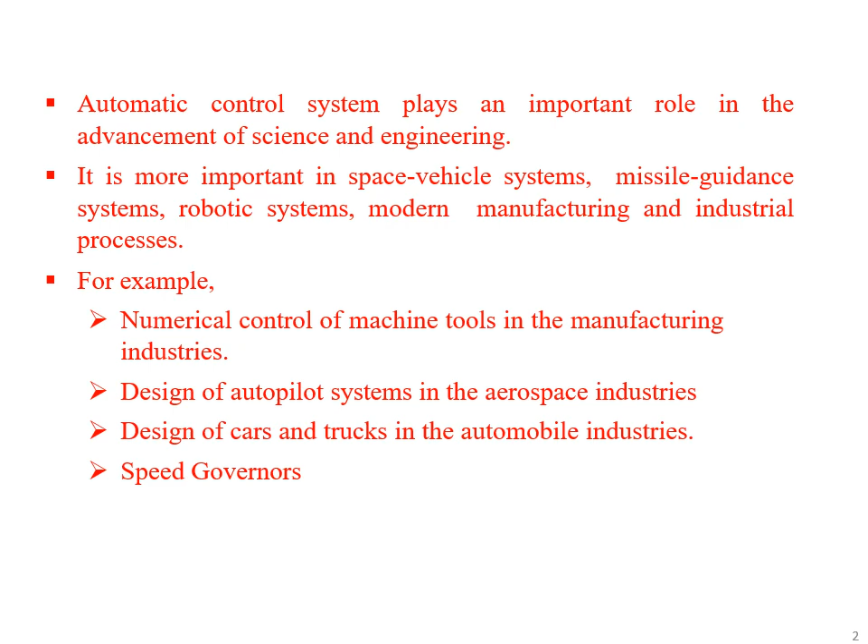Also, the automatic control system is used in speed governors to maintain the speed of the device. Automatic control system is also very essential in various industrial operations for controlling the temperature, the humidity of the process, the pressure of the process, the viscosity of the fluid used in the process, and also the flow of various liquids in the industrial process.

Now, the automatic control system optimizes the performance of the process by improving the productivity of the process and also reduces the burden, as many of the manual processes are repetitive and they can be performed automatically, so that the overall cost and time is saved.

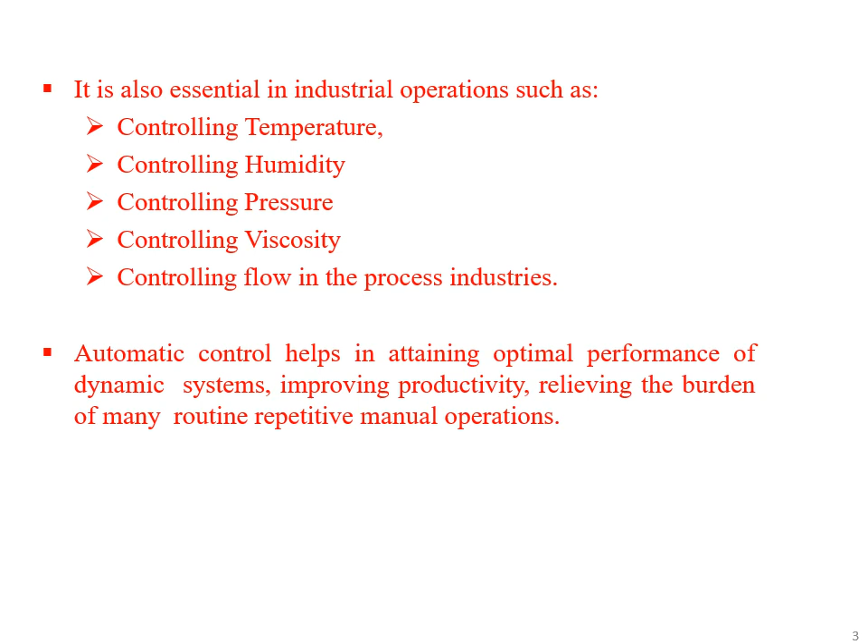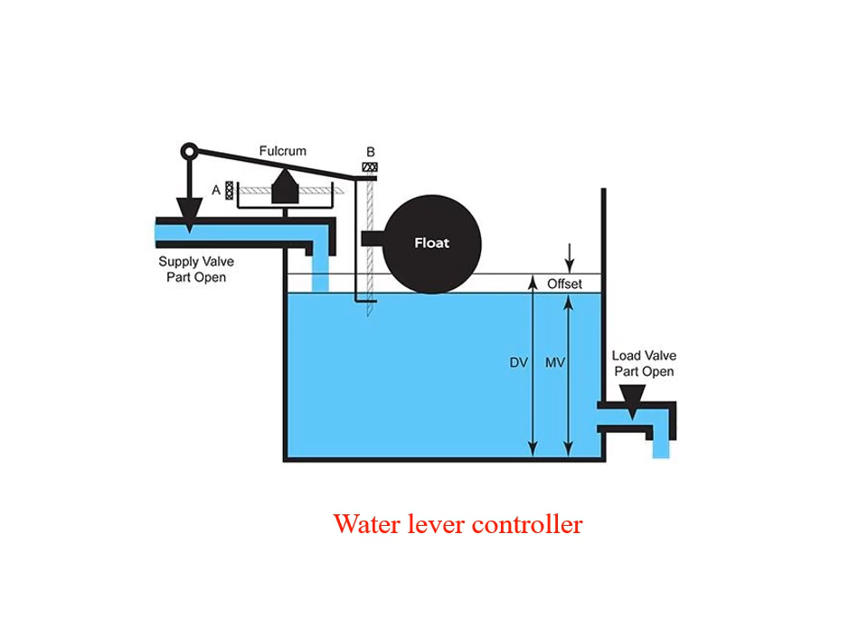An automatic control system is basically a closed loop control system in which no human interaction is required. In the forward path, it consists of a controller that will provide an input to the plant, and feedback elements in the feedback path. Whatever output is generated is given as feedback to the input side and compared with the input so as to obtain an error signal.

Means if there is a difference in the desired output value, it is compared with the input provided and accordingly an error signal is generated, so that the controller will process that error signal and provide it to the plant so as to obtain the desired output. This process is continuous until the desired output is obtained.

Now in an automatic control system, there are two process variables associated with it. First is the control variable which is controlled here, and second one is the manipulated variable. Here the input provided is the manipulated variable and output is the control variable. The control variable is a process variable that is maintained at a specified value or within a specified range, whatever is the required value.

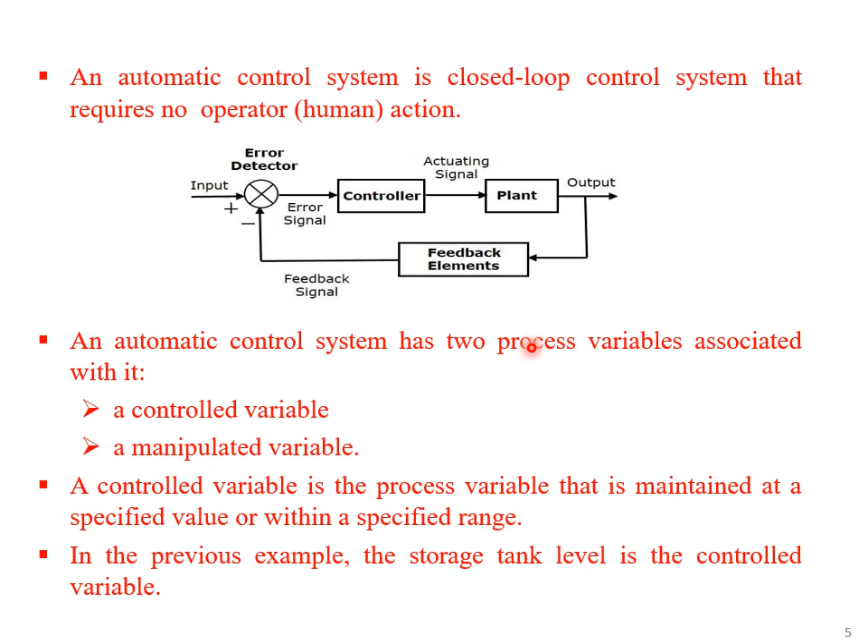In the previous example, the storage tank level is the control variable, means we require that the level in the tank is to be maintained, so the level of the tank is the control variable. Now the manipulated variable is the process variable that is acted on by the control system so as to maintain the control variable at the specified value or within the specified range.

Now the flow rate of the water supplied, as we have seen in the previous example, is the manipulated variable. Means we can change the flow rate depending upon the requirement or the level within that tank. Now the functions of the automatic control system are: first, measurement, to measure the control variable; comparison with the desired value; computation, so as to provide input to the control system; and correction, so as to maintain the desired value at the output.

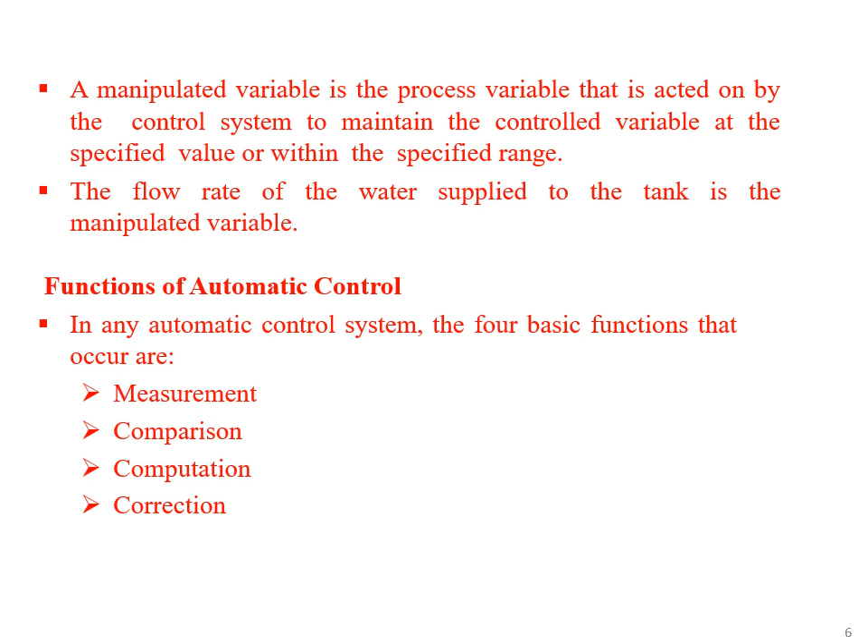Now, some of the basic terms associated with the control system are: first, the system. A system can be assumed as a combination or an arrangement of different physical components that act together so as to obtain a particular objective.

For example, a classroom is a physical system. It consists of benches, blackboard, fans, lighting system, etc. Now, the professor teaching in that classroom is a control system. It will control, give command, regulate, and direct the students so as to obtain the particular objective of the classroom according to the rules of the classroom.

And it will provide input to the students, imparting knowledge to them. So in that case, the classroom is a physical system, and the professor is acting as a control system which will control the operation of that classroom.

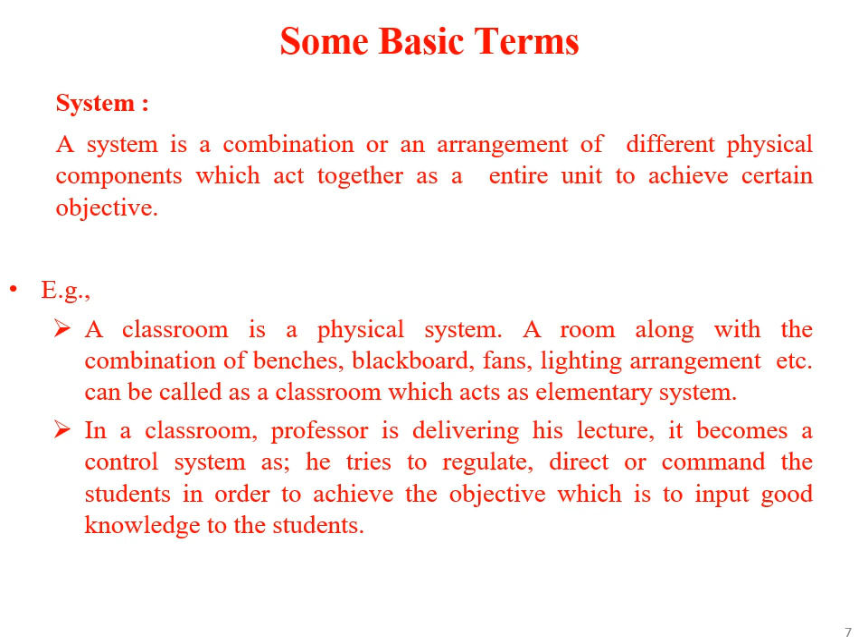Now, another term associated with the control system is the plant. The plant is that portion of the system which is to be controlled or regulated. For example, in a power plant, the production of electricity is to be controlled. A plant can be a piece of equipment, perhaps just a set of machine parts, whose operation is to be controlled.

A plant performs a particular operation. For example, in case of a power plant, it will produce electricity. Other examples are a mechanical device, a heating furnace, a chemical reactor, or a spacecraft. These are all examples of a plant.

Now, process. Any operation that is to be controlled is called a process. In case of a power plant, the production of electricity is to be controlled, so that is a process in which electricity is produced. Other examples are chemical, economic, and biological processes.

Here we can see the block diagram for a process. A manipulated input is provided to control the operation of the process, and from outside there is a disturbance input, meaning some disturbances in that particular area will affect the operation of the process. Accordingly, when both inputs are present, a response variable is produced at the output that controls the operation of the plant.

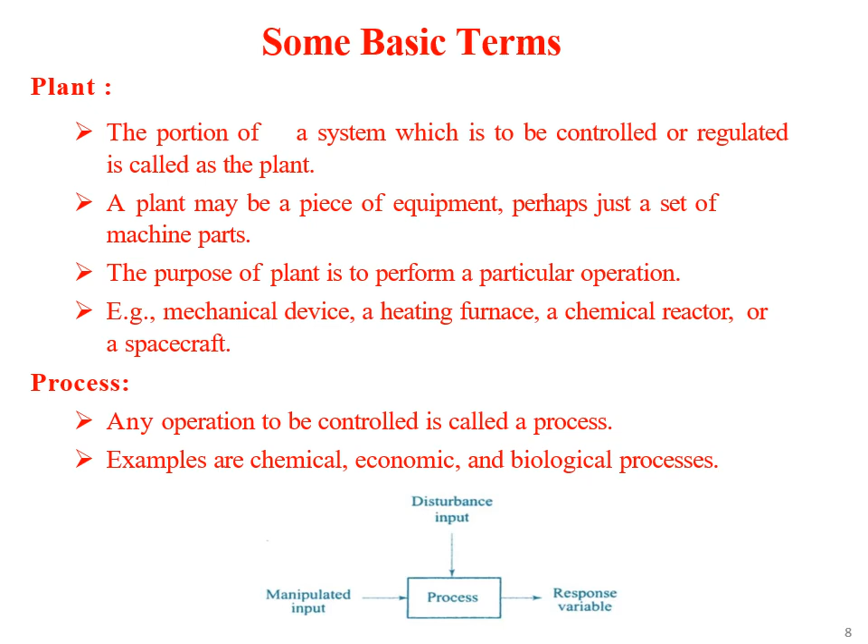Another term is the controller. The element of the system itself, or external to the system, which controls the plant or the process, is called a controller. For example, an on-off switch to control a bulb. Here we can see this is the controller which controls this process. First, the output produced is given as feedback at the input side and compared with the input provided.

The error signal obtained is given to the controller. The controller will generate the output as per the error signal given as input. That controller will provide input to the process so as to control the measured output.

In case of a bulb, we have to control the on-off operation. So in that case, the switch is acting as the controller. It will control the on and off position of the bulb.

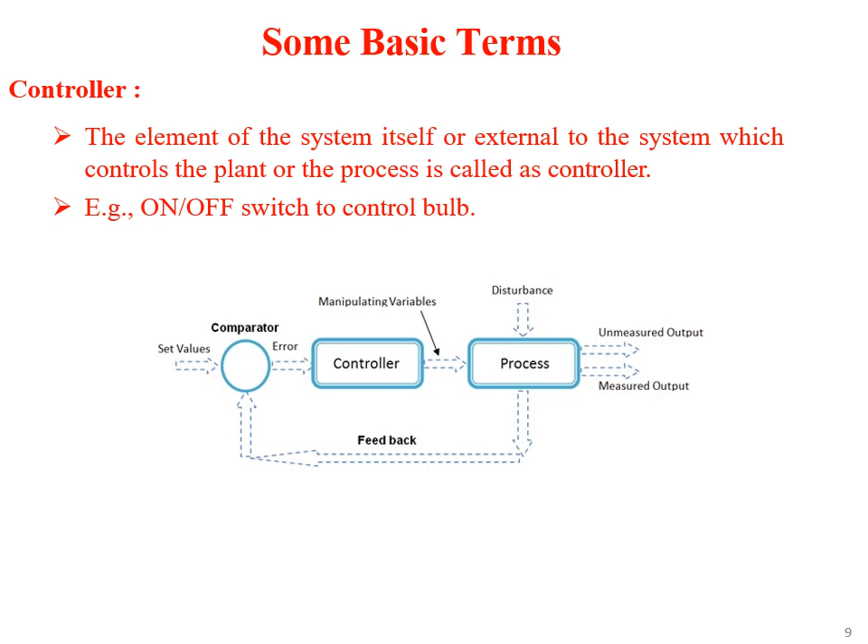Now, another important term is the input provided to the system. Input is an applied signal or an excitation signal that is applied to the control system from an external energy source so as to produce the desired output.

In that case, we can see that the input is given to the controller, and that controller will provide a manipulated variable that controls the process. The controlled output will depend on the operation of this process, depending upon the manipulated variable and the disturbance input. Now, for each system, there must be an excitation that the system accepts as input.

Another thing is the output. It is a particular signal of interest, or the actual response obtained from a control system when input is applied to it. As we have seen in the case of a water level controller, the desired output in that case is the level of the tank.

The input is the flow of the liquid, meaning the closing and opening of the input valve. Depending on that, the level of the water in the tank can be controlled. So for analyzing the behavior of the system for such input, it is necessary to define the output of the system.

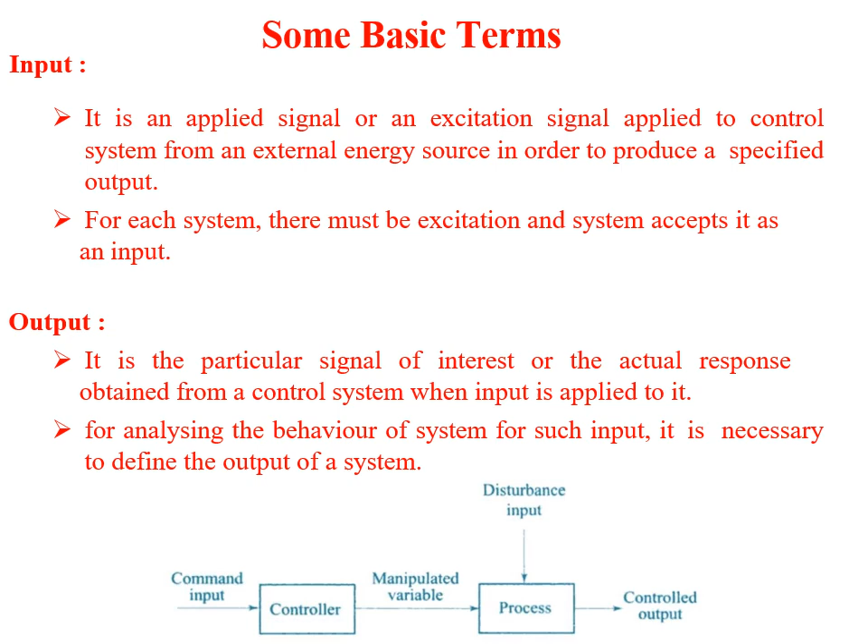Another term associated with the control system is disturbance. Disturbance is a signal that will adversely affect the output of the system. It is an unwanted input.

Disturbances are undesirable and unavoidable effects that are not under control, and they are generated from outside the process environment and from within the system also. If the disturbance is generated within the system, it is called internal disturbance, and if it is generated from outside the environment, it is called external disturbance.

It will affect the performance of the output in an undesirable manner. The disturbance that is generated outside acts as an extra input to the system in addition to its normal input, and it will affect the output adversely. The presence of disturbance is one of the main reasons for using a control system.

If this external input goes to the process, it will affect the output and change its value. Then that controlled output is given as feedback to the input side, and it is compared with the input so as to control the process.